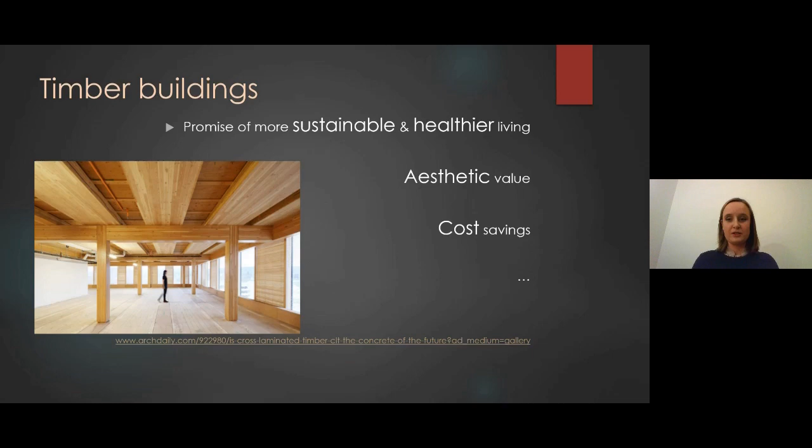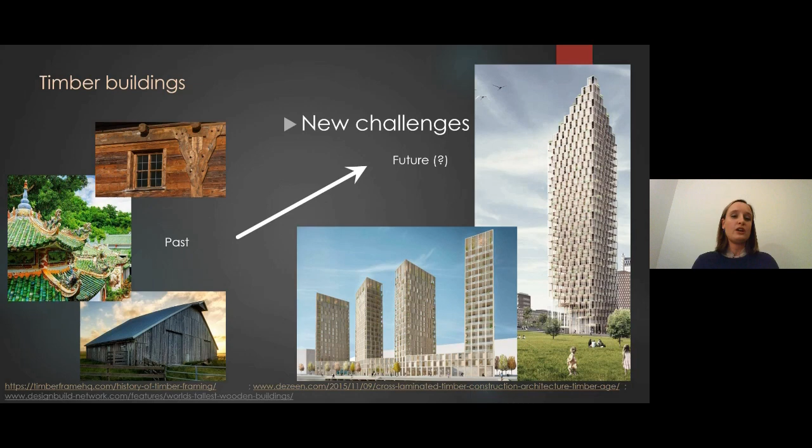Timber has been used for centuries, probably longer actually, but the way that we've designed buildings in the past is different from how we design buildings today. Concrete and steel have allowed us to build taller and taller, and we use our cities differently, we have different needs. So the question is, does timber allow the same thing?

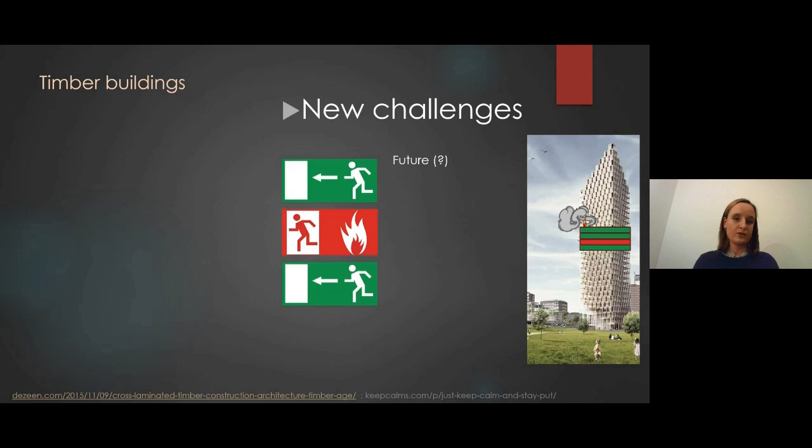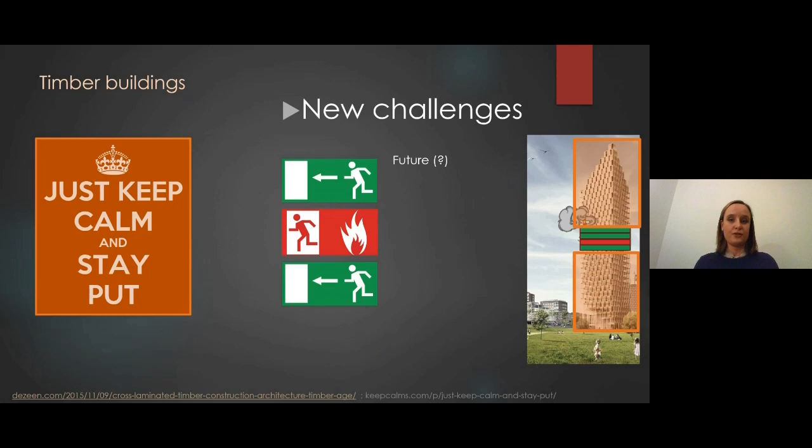In high-rise buildings, fire safety strategies often rely on phased evacuation. So you have a fire on one floor, and then that floor is evacuated, and depending on where you are, a certain number of floors around that fire floor is also evacuated. But what happens to the rest of the building? In many fire safety strategies, we just rely on people staying put for a certain amount of time, or even until the fire is out. For that to work, the structure has to survive burnout of the fuel load. Now the question is: is that also possible for timber buildings?

Steel and concrete are non-combustible. These are the hazards that we are accustomed to and that we are used to designing for. But timber is combustible, and the hazards that timber poses are very different from the hazards that steel and concrete pose, exactly for that combustibility reason. Why does that matter? Different material, different challenges.

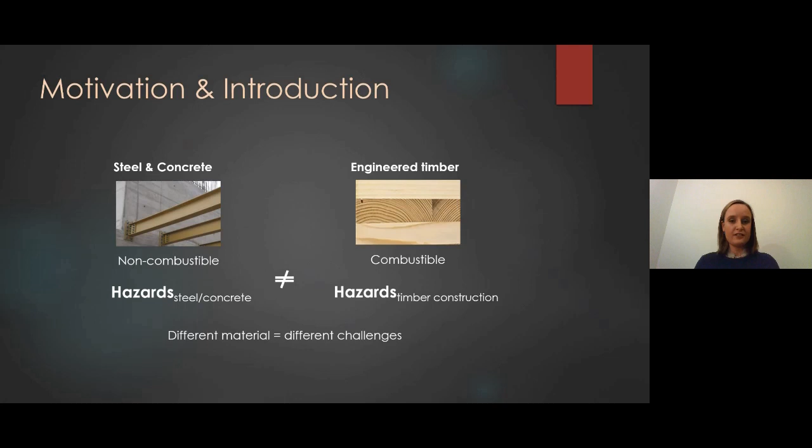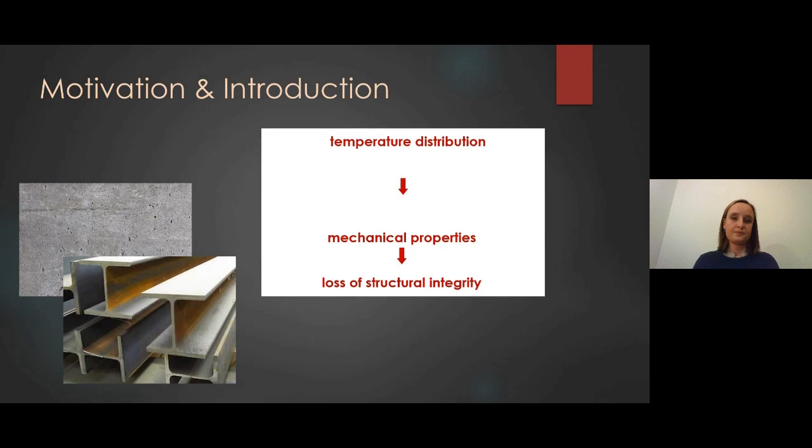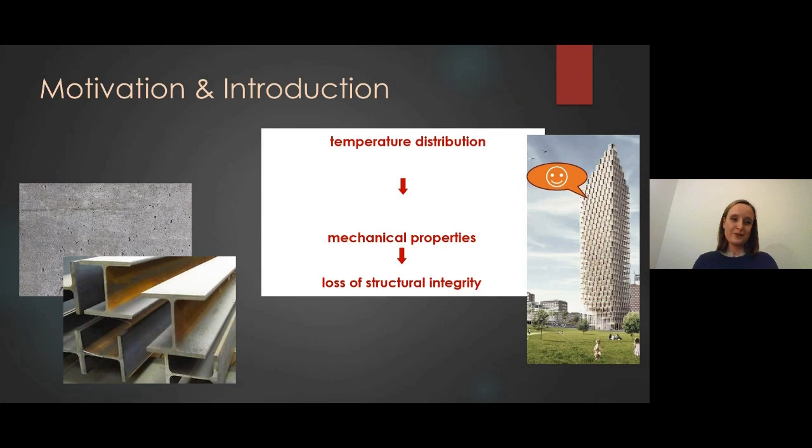For non-combustible structures, the temperature distribution throughout the structure determines the mechanical properties, and the mechanical properties determine the loss of structural integrity, which is quite predictable. So if we can estimate the fuel load, we can more or less estimate the fire, and then we can more or less predict the heat transfer into the structure. Then we know for how long the structure will remain stable, and if it will still be stable when the fire goes out. Of course, that's a gross simplification of what we actually have to do in practice, but more or less, that's the summary of it.

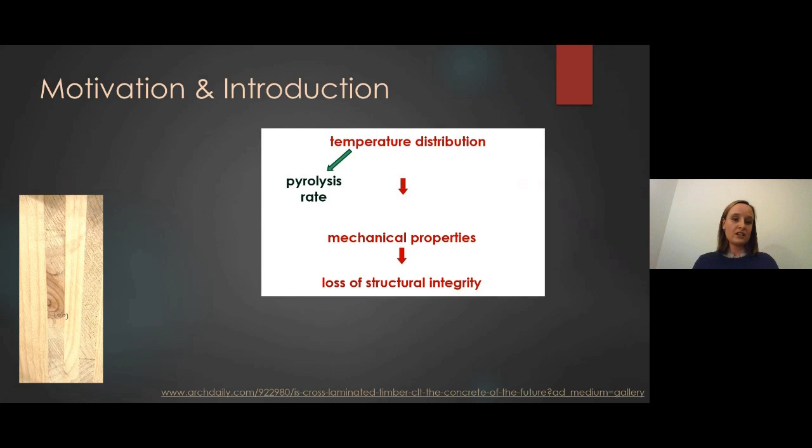Now, for timber, the story is a bit more complicated. The temperature distribution throughout the timber determines the pyrolysis rate. The degradation of the timber forms a layer of char, and it also produces combustible gases. Those combustible gases contribute to the fire, increasing the fuel load present to burn in the compartment.

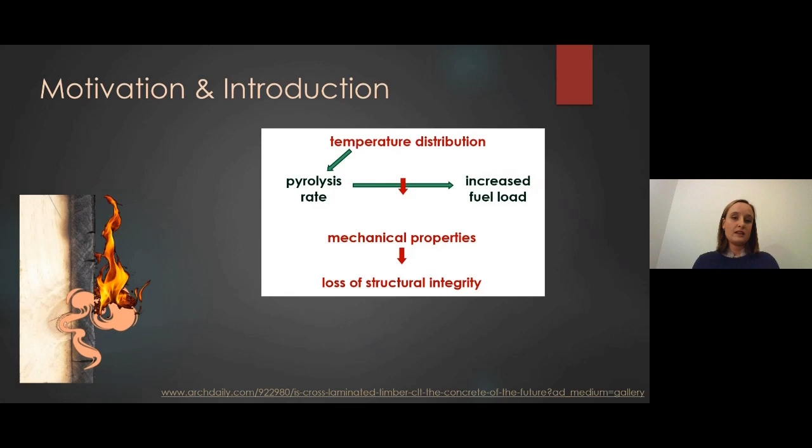Now, these processes are coupled and make everything much more complex. That makes it harder to predict the mechanical properties and to predict the loss of structural capacity. It's no longer possible to define a period of fire resistance that is relatable to the burnout of the fuel load, because the structure itself is burning. So in summary, in a timber building, the fire is coupled with the structure.

And I haven't even talked about moisture yet, and it's already complex enough. I will spare you the moisture discussion today, but it also plays a role.

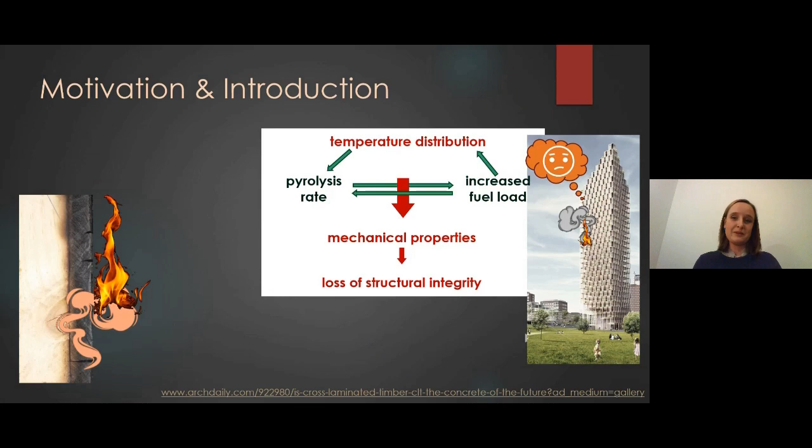So yes, do we have to be worried about this? The burning of timber has been studied a lot in the past and has been presented a lot in the past, more brilliantly than I could. So I will focus on the key characteristics today.

Timber is a charring material. Far away from the heat, there's some section that is not pyrolyzed, that is basically unaffected by the heat. Next, we have the pyrolysis zone between 200 and 350 degrees Celsius. This is where flammable gases are produced. And on top of that, we have a rigid carbon-rich char layer on the surface of the timber exposed to heating.

This char acts as a heat shield or as a barrier for the heat, and it protects the underlying timber regions. As a result, the pyrolysis reaction can slow down until the production of gas is so low that the fire can extinguish. That is the principle of auto-extinction.

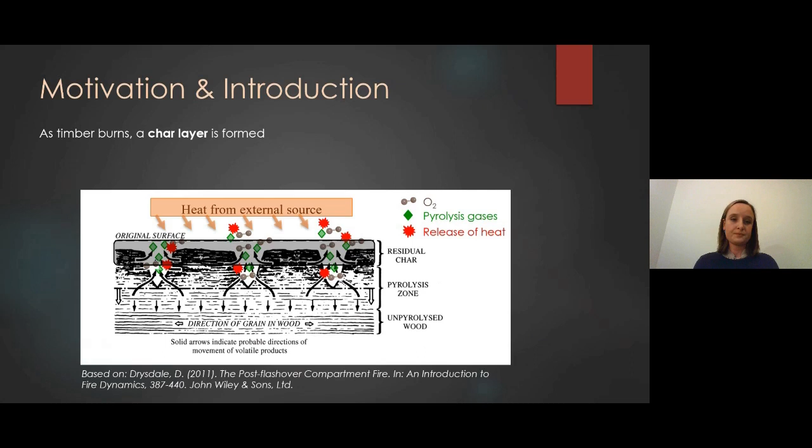So the rate of in-depth heat transfer is reduced, and that reduces the temperatures throughout the section thickness, and that means that the loss of structural capacity is reduced as well.

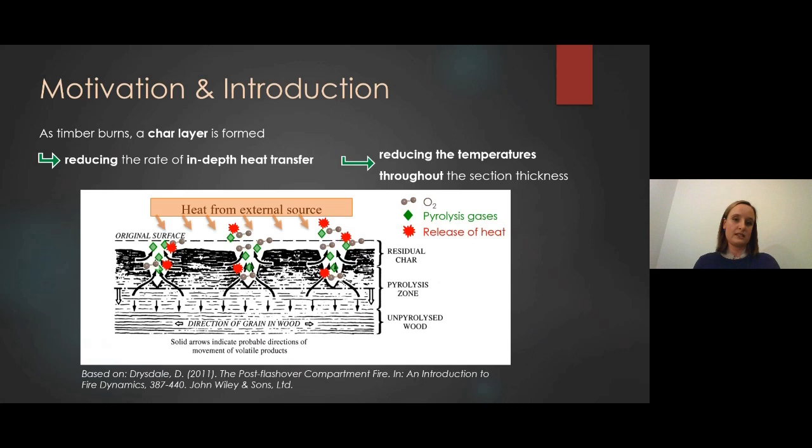But the char layer is not stable. There are different processes that can reduce its thickness and its integrity. The char reacts with the oxygen from the atmosphere, and that slowly reduces its thickness. And as is indicated in this drawing here, the timber also cracks from stresses, so then you have a higher surface area that can react with the atmosphere.

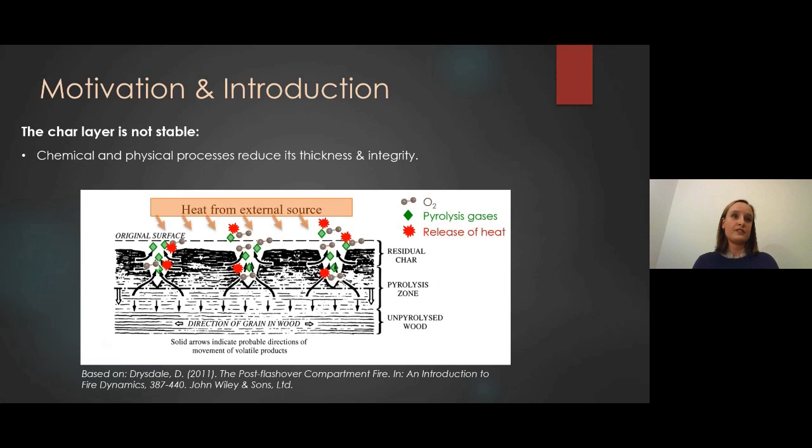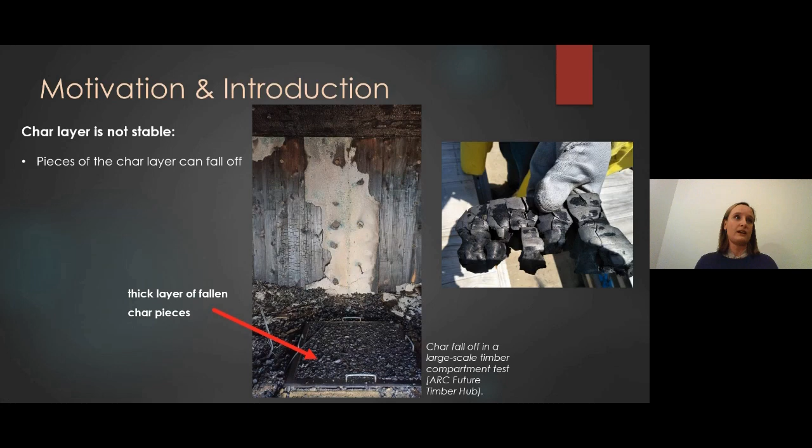Engineered timber is especially susceptible to char fall-off because it consists of different layers that are glued together. These layers can detach from each other when the timber product is heated, or when it burns, or when it experiences increased local loading. This detaching can be caused by multiple mechanisms - adhesive failure or cohesive failure within the timber or the glue layer - and then these lamella separate.

Many authors refer to this as delamination. I don't like that term because it gives the wrong impression that the entire first lamella falls off at once. But as we've seen in the pictures before, many times only small pieces of char fall off. That's why I prefer to just call it as it is - char fall-off, for sudden loss of charred material. And I just call it char loss in general to talk about oxidation, char fall-off, and other mechanisms that reduce the char layer.

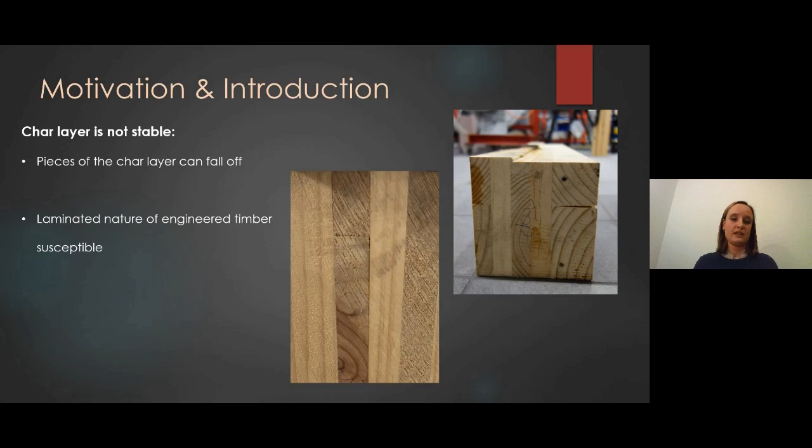The loss of the char layer results in increased heat transfer to the timber structure. And we've seen before that this increases the pyrolysis rate, which then increases the fuel load, and so on. These interacting processes can prevent self-extinction.

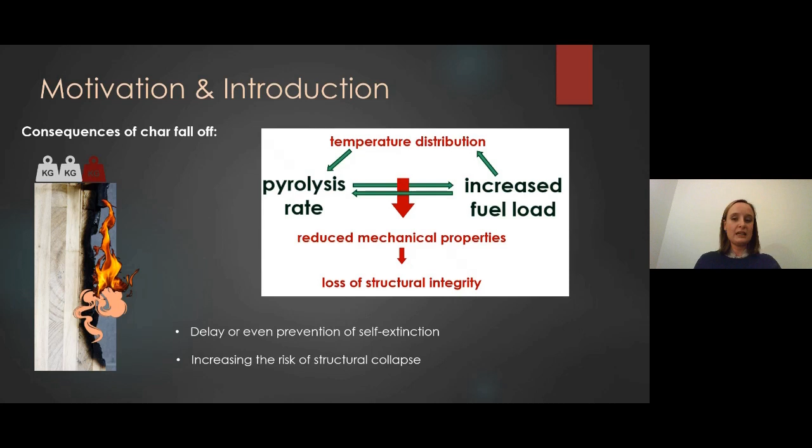The process of char falloff is widely documented in literature and is identified as a key factor to hinder fire-safe design of timber structures. But surprisingly, there have not been any in-depth studies of char falloff or char loss and its impact. It's still perceived as very stochastic and unpredictable, and we tried to start to change that.

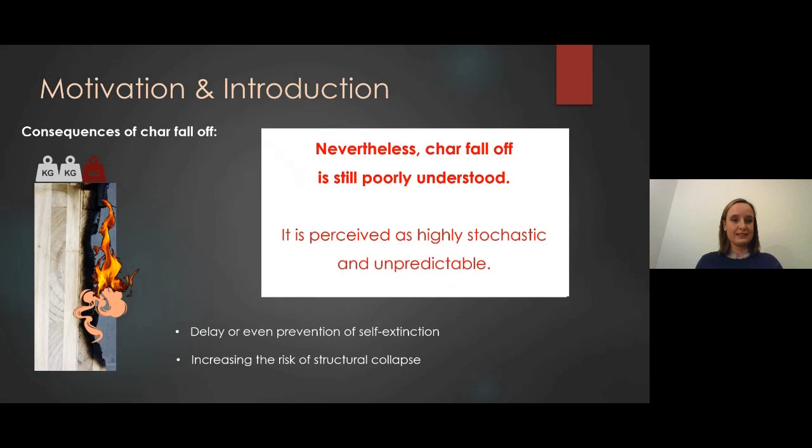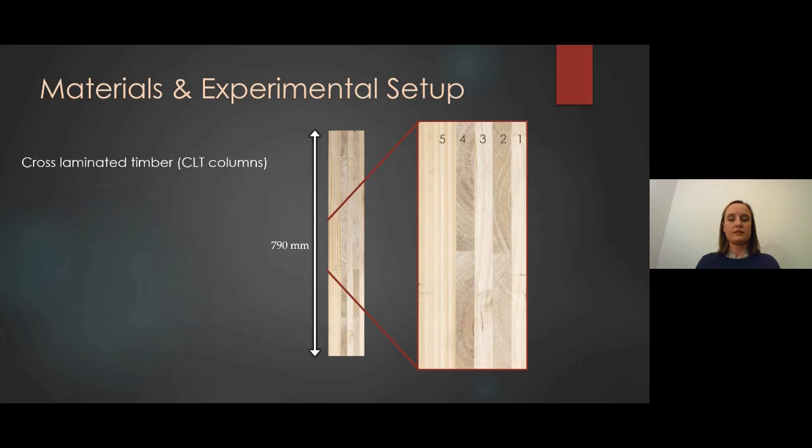So we did a study with cross-laminated timber, as you can see here. We used columns that were 790 millimeters high and consisted of five lamella. The first lamella was 2 centimeters thick. We trimmed it down a little bit so that the first glue line would heat up earlier and the char would fall off sooner.

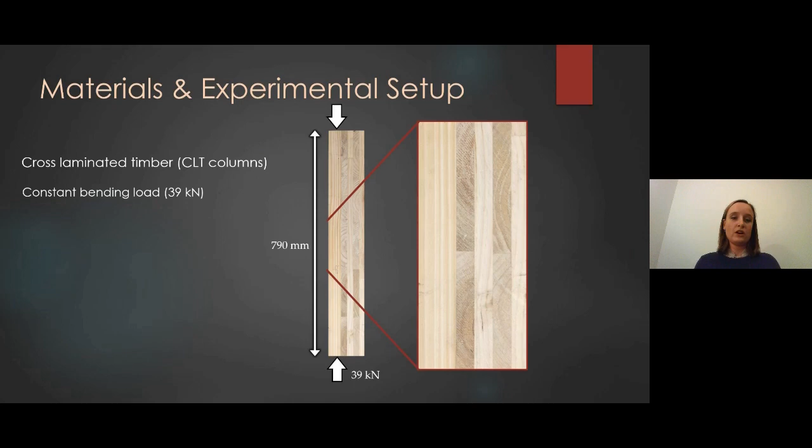We also loaded the sample with 39 kilonewtons. I think it's really important to account for the interactions between mechanical and thermal load, and it's also more realistic. By definition, a structure is expected to carry load. So if we don't know exactly how these processes interact, I think it's important to reproduce them as realistically as we can. And that's always important when you design a test setup: either you know exactly which of the factors you're isolating, or you reproduce what you would expect to see in the structure you actually want to understand.

We used bending, as we think that's the worst case for the stresses in the first lamella. So we applied the load eccentrically, as indicated in the slide, and that way the sample bent towards the radiant heat source that I'm going to show in a second. The stresses in the first glue line, we believe, would promote char falloff and represent the worst case.

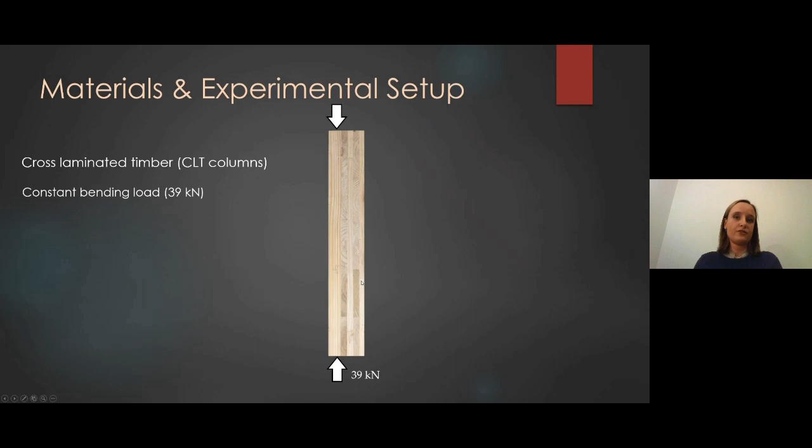After loading, the sample was exposed to heat from a radiant panel. We tested at two different heat fluxes, 20 kilowatts per square meter and 50 kilowatts per square meter. Both these heat fluxes are high enough to achieve flaming of the timber sample, but the lower heat flux is below the critical value for self-extinction of timber, and the higher heat flux is above that critical value. So we tried to capture this range of possibilities.

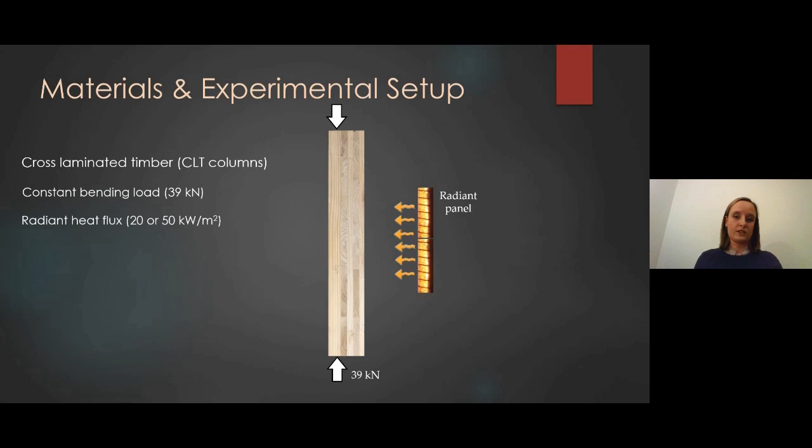We didn't want to test for structural failure, so we chose a load lower than the expected structural capacity. We stopped the test when the second glue line reached 100 degrees Celsius, because we wanted to observe char falloff of the first lamella only. That way we could study the sample afterwards and learn more about it than if we had tested it to destruction. This was just not the purpose of our study.

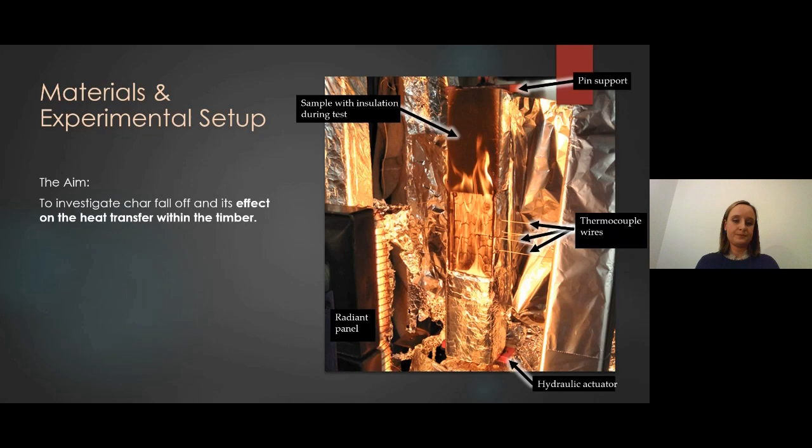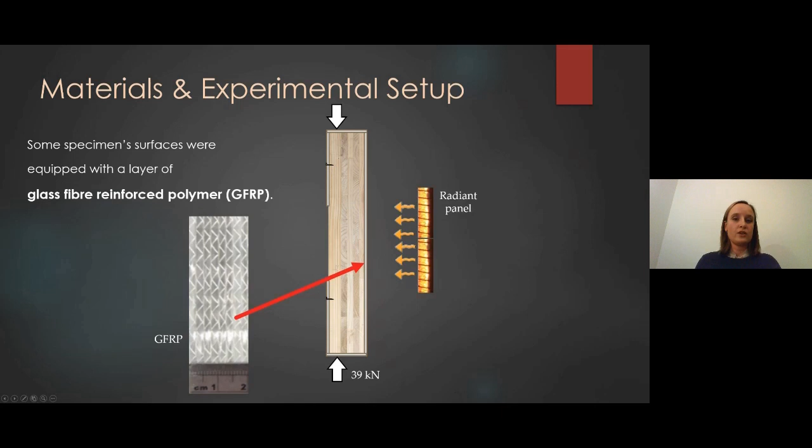To create a control group, if you will, we equipped some specimens with a thin layer of glass fiber reinforced polymer, as indicated here. It was wrapped around the entire exposed surface of the sample and then anchored at the back with metal staples. Metal staples because we expected them to stay in place even when the sample was heated. That's also why we stapled from the back and not the front. But the polymer part indicates that we also used epoxy. You can see one of those samples here, so you can understand what it would look like.

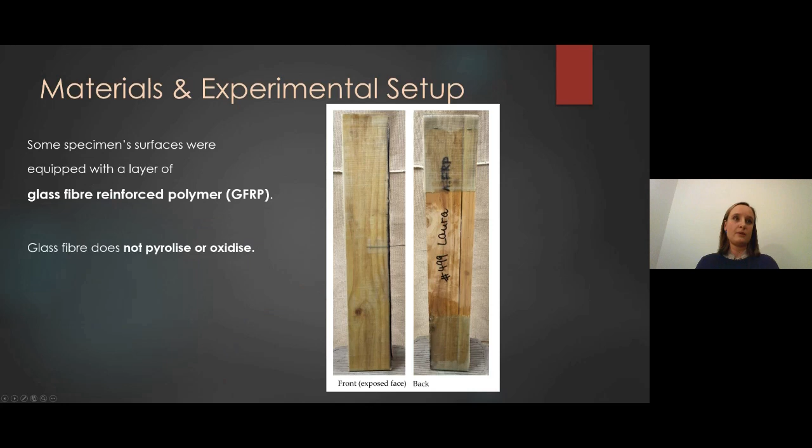So the glass fiber is so thin that you can still see the timber pattern through it. I got a question not long ago about whether the glass fiber also does something structurally — that's actually where the idea came from. Glass fiber is used to improve the structural performance of concrete and timber, but we didn't look into that in this study. We used glass fiber because it's inert, so it doesn't pyrolyze and doesn't oxidize. The glass fiber mat acted as a net and mechanically prevented char from falling off.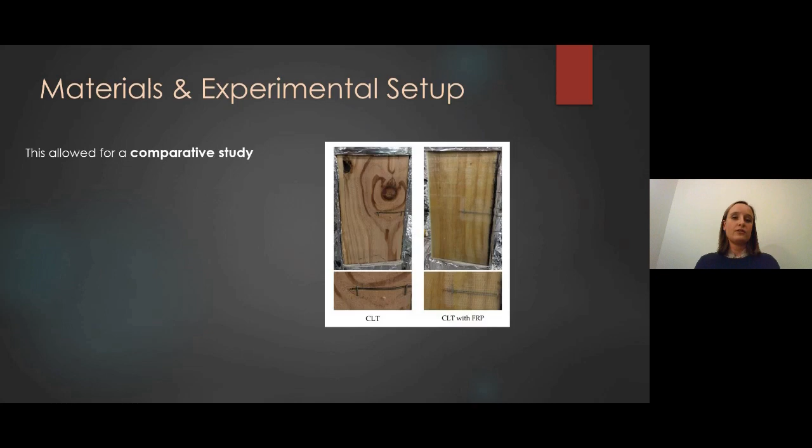This allowed for two kinds of studies, and I'll present results from both today. First I'll talk about the char falloff that these unprotected CLT samples experienced. Then I'll talk about a comparative study between samples with char falloff and samples without, and that way we can start to understand the impact of char falloff on the timber.

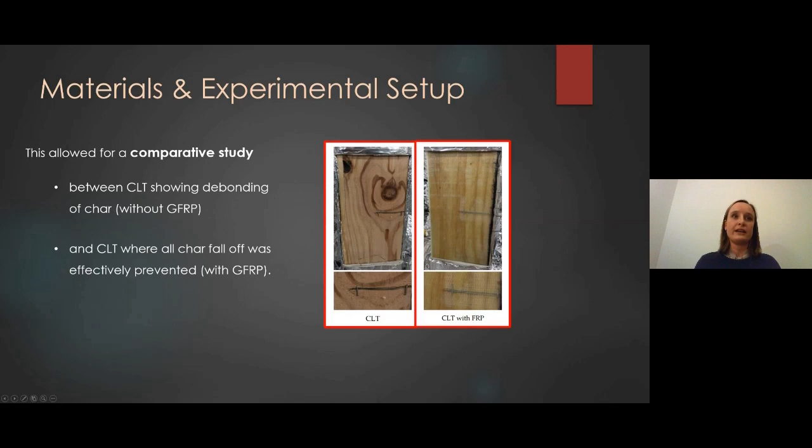So let's look at observations from the first study of char falloff. All these unprotected CLT samples show char falloff. This sample was exposed to 20 kilowatts per square meter, and this is roughly the area that experienced char falloff.

Here you can see three different samples for comparison. All of them experienced char falloff, and the sample on the left experienced quite significant char falloff. In the middle, almost everything is gone — almost all of the first lamella of the exposed surface. The one on the right is the one you saw before, where maybe around half of the char detached. In theory these samples were exposed to exactly the same conditions, the same external heat flux, the same load. They came from the same batch of CLT, and still the difference in char falloff is quite significant.

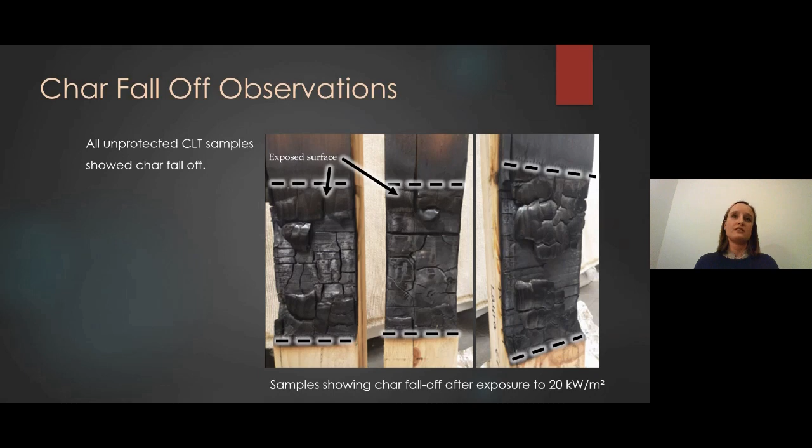I started to look at that in more detail. This is work in progress, which is why I can only show you two examples at this point. So what I looked at was where the char falls off and in which order.

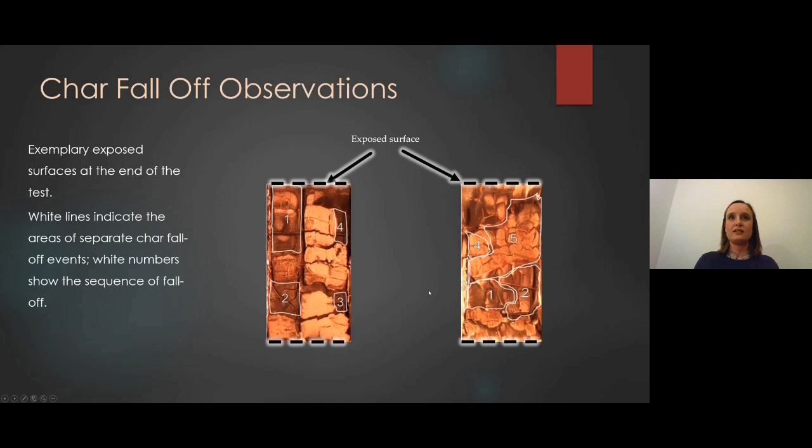These numbers indicate when the char fell off. Here you see the first event of char falloff, the second, the third, and the white lines indicate the area that fell off at once. You can see the left and the right look very different. On the left you have four char falloff events, and none of them are neighboring each other — they're all remote. On the right, the central part fell off, and all these events are right next to each other, as if they affected each other, which is quite interesting, but it doesn't obviously follow any pattern.

We also looked at these temperature measurements that I told you about. In this plot, every marker represents one char falloff event, and the y-axis shows the temperature at that event. It's scattered over quite a large range, over 600 degrees. We have char falloff events only at temperatures above the moisture evaporation point of 100 degrees Celsius, but we had char falloff at temperatures as low as 135 degrees Celsius, and then over 600 degrees as well.

So there's no clear trend in this either. I'm showing this plot because I think a lot of people assume temperature is the only thing controlling char falloff, and that with isotherm methods it's easy to predict when char falls off and then design a safe building. But these isotherm methods would have to be quite conservative, even below 135 degrees. So I think temperature is not the only thing controlling char falloff, and we must account for other mechanisms — we first need to understand these before we can continue trying to predict char falloff. This is just one example highlighting how complex char falloff seems to be, and that it's maybe more unpredictable than we thought.

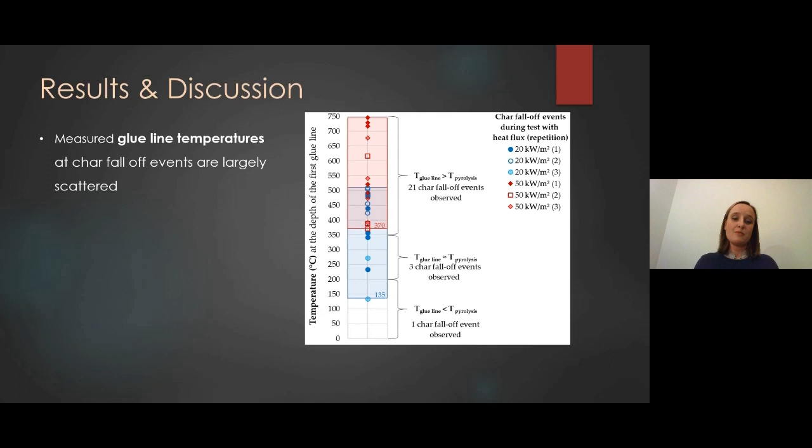I also looked at the pieces of char that fell off after the test. This is char that I selected and collected from the floor after the test. You can see it's a range of shapes and sizes of projected areas. And this is only a selection of pieces from one test, not all of them.

In one test we had almost 140 pieces, while before you saw we had only 4 or 5 char fall-off events. So something happens in between the char detaching from the surface of the column and when we collect it at the end of the test.

I'm showing you this to highlight that certain information can be gathered from the char on the floor after the end of the test, but I think it's also important to look at the char as it is falling off throughout the test. So we need to be careful what conclusions we draw from which moment in time and from which piece we're analyzing.

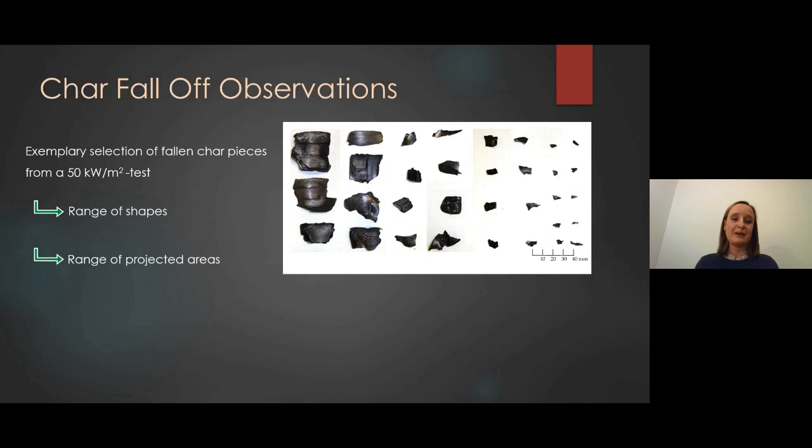So let's move on to the comparative study. This is the control group, as I called it before. In this set of samples with glass fiber, we experienced no char fall-off. You can see here this piece of char detached quite clearly, but the glass fiber is holding it in place.

So while the first lamella is entirely charred, or looks entirely charred, none of it has fallen off because the glass fiber mat was there, but you can see again how thin the glass fiber actually was. And this first layer of char timber clearly seems to have protected the second lamella.

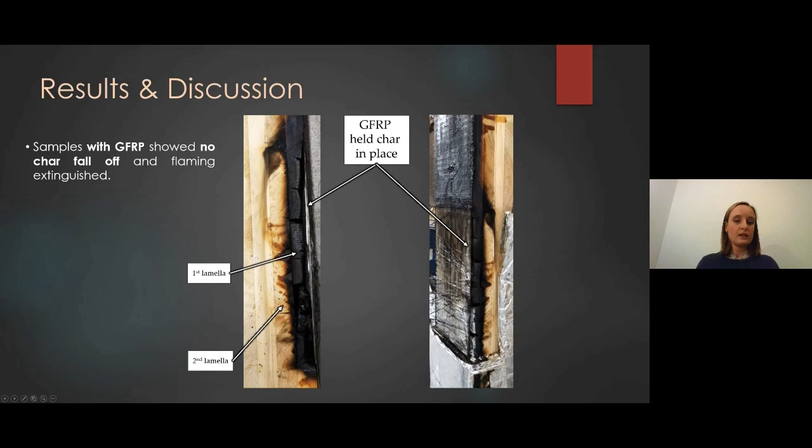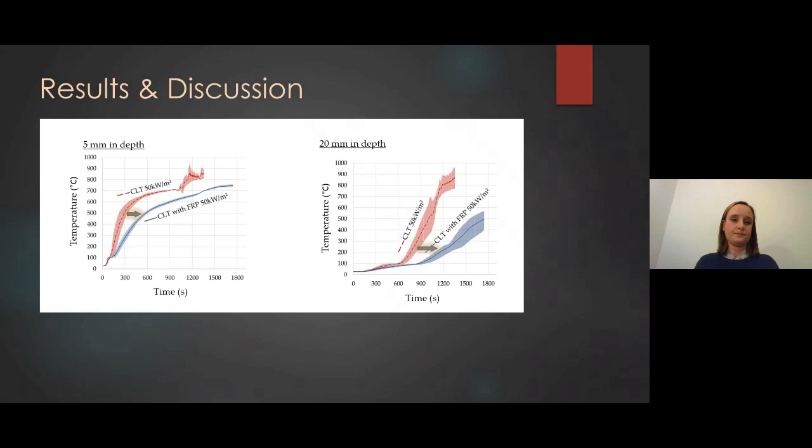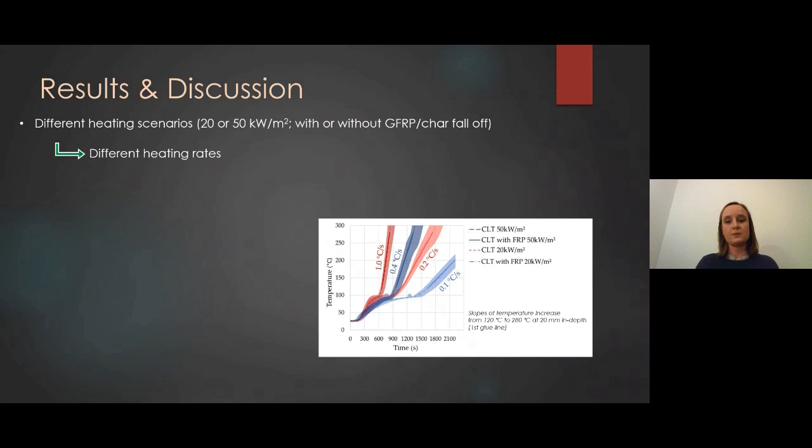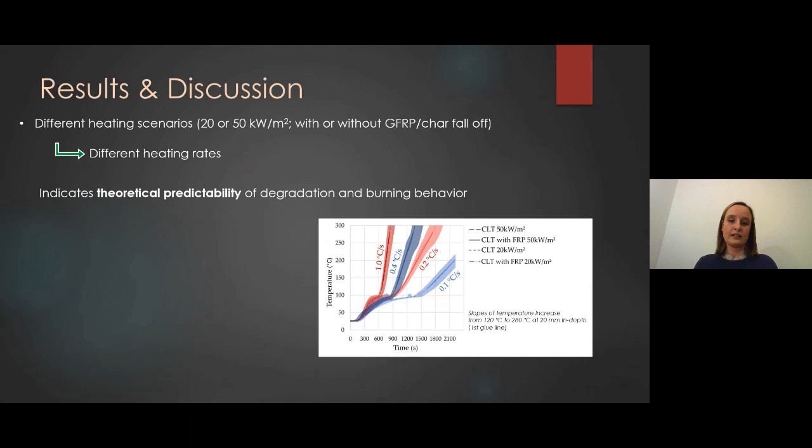But on the other hand, you can see that for each scenario the range of data is quite narrow. So I think this indicates that if we understand when char fall-off happens and what case we're actually dealing with, or if we learn to prevent char fall-off, then we can learn to predict the response of the timber and its contribution to the fire. Maybe adjusted heating rates like the ones here could be used to design timber structures in the future.

I should point out that this data looks quantitative, but we only had a limited set of samples, so I don't think any of it can be readily extrapolated to other fire scenarios. This study was intended to give qualitative conclusions and an idea of how big an impact char fall-off actually has. So I'm going to present some qualitative conclusions.

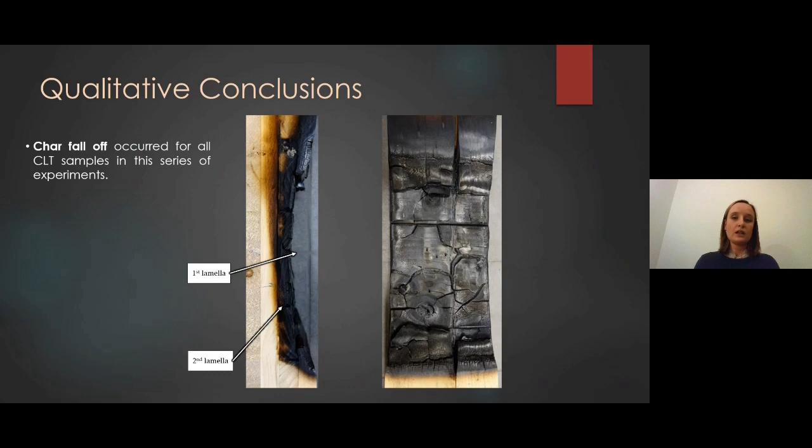Char fall-off occurred for all CLT samples in this series of experiments that were unprotected. Char fall-off strongly influenced the thermal response of the timber. It changed the heat transfer in depth, and the faster progression of heat transfer in depth affects the pyrolysis of the timber, as I explained before.

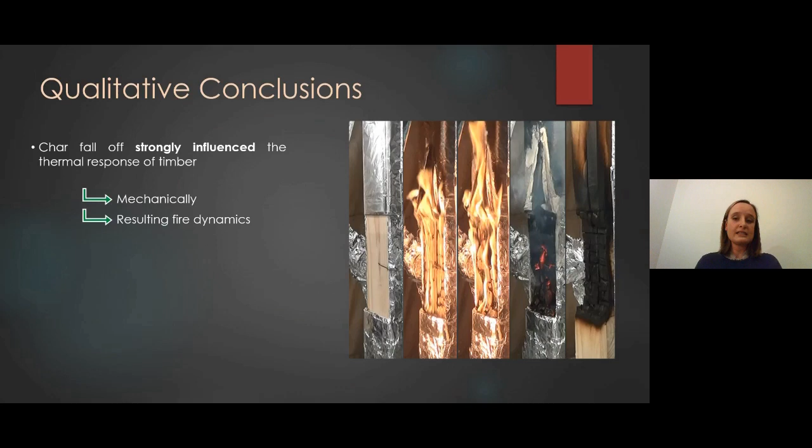So char fall-off has an impact on the mechanical response of the timber in fire, but also on the resulting fire dynamics. And this implies that the loss of the char layer directly impacts the residual structural capacity.

I think that we need to develop suitable research methods to understand char fall-off and its impact, because we've seen that it does have a significant impact. And I think we need to learn one day to be able to predict it and to account for it.

I think there are 3 main areas to focus on: understanding why the char falls off, which mechanisms are controlling fall-off, and then we can learn how to predict char fall-off, and how to prevent it, for example with the glass fiber as I showed you here, though I'm sure there are other methods. But firstly, we need to build a strong fundamental understanding of char fall-off so that these mechanisms to predict or prevent it can be successful and reliable.

Otherwise, we would just need a huge number of tests because we're talking about real fires. So we need to look at different fire scenarios, different heating rates, different timber types, different adhesive types, different manufacturing techniques, different loading cases. I think the list is almost endless until we get significant statistical data to then reliably predict char falloff without understanding it.

So I believe that unless we understand the drivers behind char falloff, we cannot move on from the scattered testing that has been done at the moment. I would really like to see those tests combined in a more meaningful approach, but to do that, we need to understand what is happening.

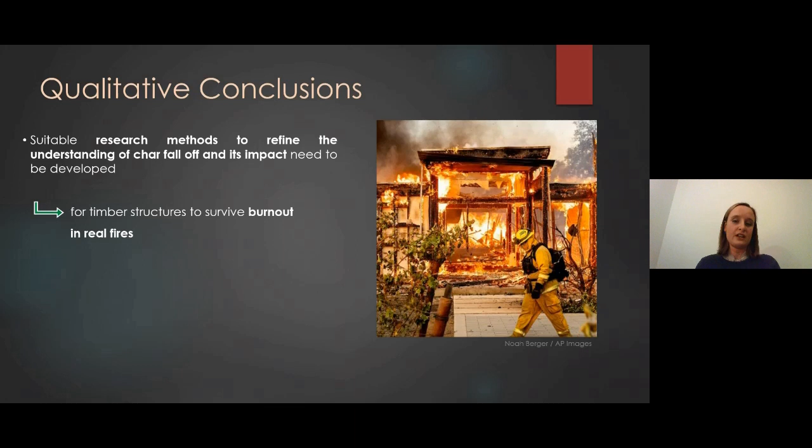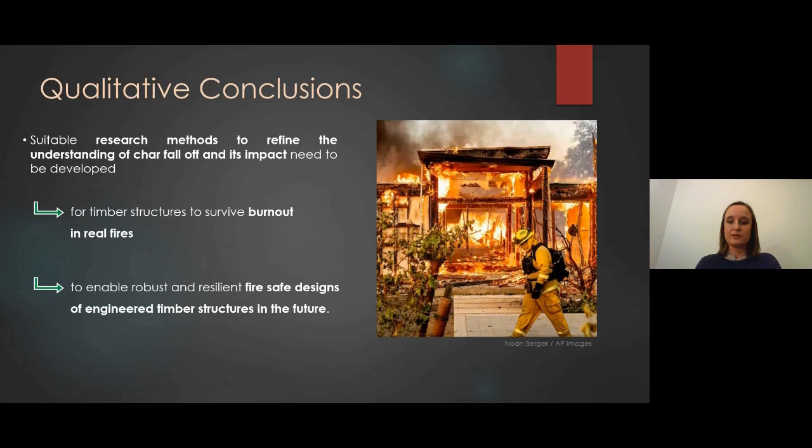I hope that I have emphasized enough how important that is to understand the impact, because fire safety strategies often rely on the structure to survive burnout in real fires. And I think that is only possible if we develop a thorough understanding, and then that will enable resilient fire safe design of timber structures in the future.

Matthew, are there any questions already?

If that's the end, thank you very much, Laura. It's the end. Yeah, no, that's very good. Enjoyed that. I don't think we've received any questions in the Q&A yet. Oh no, I'm completely wrong, it just didn't show up on the notification. We do have one from Colleen saying, thank you, Laura.

Did you observe much char falloff that was not associated with a glue line? Yeah, I think that's an excellent question. Yes, a bit. I can't give you an exact number because it's really difficult to connect, after the end of the test, which piece on the floor belongs to which char falloff event. I would say the majority occurred at the glue line, or started at the glue line, so that the entire depth of the first lamella fell off. But I did also have very small pieces falling off. I can see on the videos of the test that sometimes it was just tiny little chunks. But I think the majority occurred at the glue line, and that is potentially because the first lamella was only two centimeters thick, so that's another thing I think we have to look at. If we have a thicker first lamella, do we lose smaller pieces, or do we still lose it at the glue line?